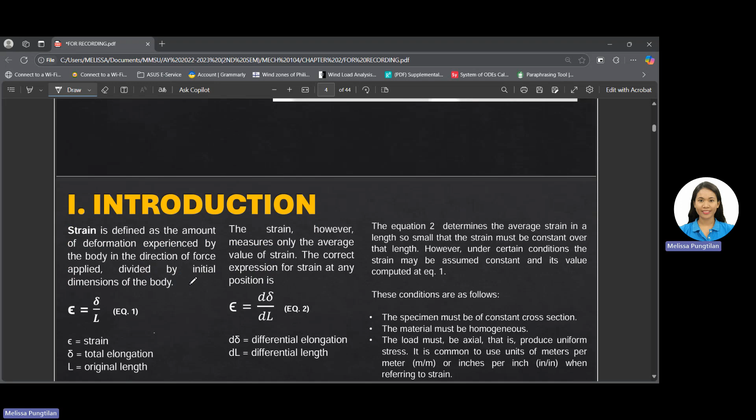So, here, strain is defined as the amount of deformation experienced by the body in the direction of force applied divided by the initial dimensions of the body. So, strain, this is read as epsilon, okay? Epsilon or strain is equal to the total elongation divided by the original length. So, yan yung tinatawag natin na amount of deformation experienced by the body, okay? Or yung ating strain. And then, the strain, however, measures only the average value of strain. The correct expression for strain at any position is equal to the differential elongation divided by the differential length.

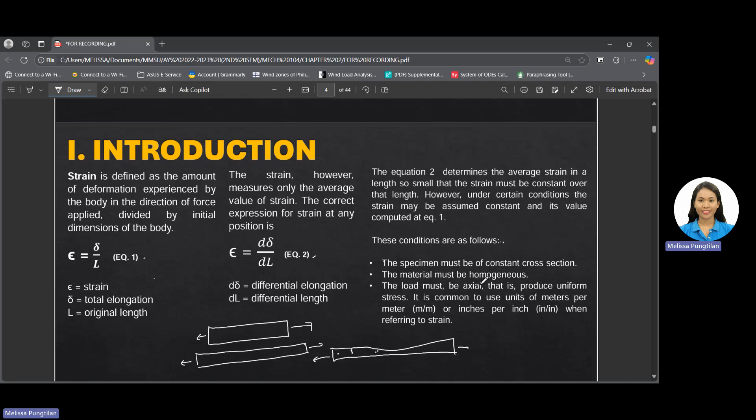Okay? So number 1, the specimen must be of constant cross-section. The material must be homogeneous. Sabihin, it is made up of one material. Okay, made up of one material. So pag ginamit natin yung formula na to, make sure na this is a homogeneous material.

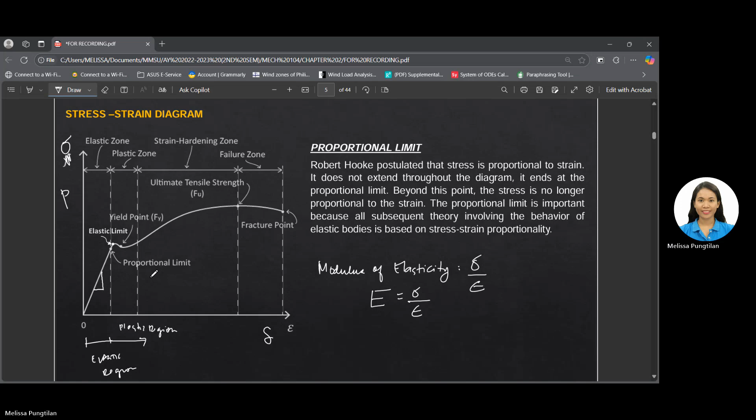Okay, so elastic limit, ito po yun. Ayan. So, ibig sabihin ng elastic limit, if we applied a force that is equal to the elastic limit or below the elastic limit, pag in-apply natin sa isang material, and then tinanggal natin yung force na yon, it will return to its original length.

Okay? Kunwari, meron tayong rubber band, or meron tayong rubber that is equal to, let's say, 50 millimeters. Ayan. So, yung elastic limit ng force is equal to, let's say, 5 kilonewton. Mataas. Sige. 5 kilonewton. Okay. So, for this one, pag nilagyan ko ng 5 kilonewton yung ating rubber band, take note, nasa elastic limit tayo, ha? Bali, yung elastic limit is equal to 5 kilonewton.

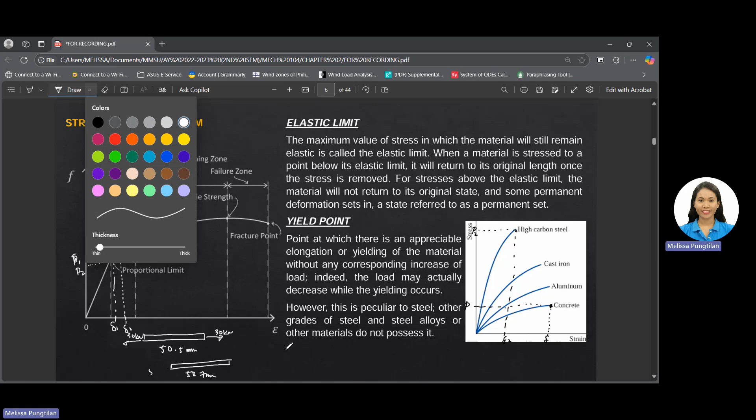Unlike sa concrete. Kung may hindi pa nakakita sa inyo ng mga column or beam na ginagamit sa site na made up of steel, usually ang shape nun is I-shape. Ito yung ginagamit sa mga large construction project, ginagamit na beams or for columns because of this property na kahit lagyan mo ng malaking load, the deformation is still minimal.

Pero bakit palagi nating nakikita is yung concrete? Kasi in terms of cost, napakamahal kasi ng bakal, mas mahal yung bakal compared sa konkreto. Kaya hindi pa masyadong ginagamit or hindi usual na nakikita sa site yung paggamit ng steel because of its price.

But in terms of its mechanical properties, steel are better than the concrete. At yung kanyang constructability, mas mabilis yung pag-install natin ng mga bakal compared sa konkreto. Sa konkreto kasi maghihintay pa tayo ng 28 days or yung tinatawag natin na curing period bago natin siya loadan or gamitin.

Maghihintay ka pa ng tinatawag natin na curing period. Sa high carbon steel, aside from mabilis siyang i-weld or i-bolt, i-connect with each other, the constructability ay isa sa pinaka-advantage, aside from dun sa mechanical properties. Pero mahal kasi yung cost of the steel compared sa concrete.

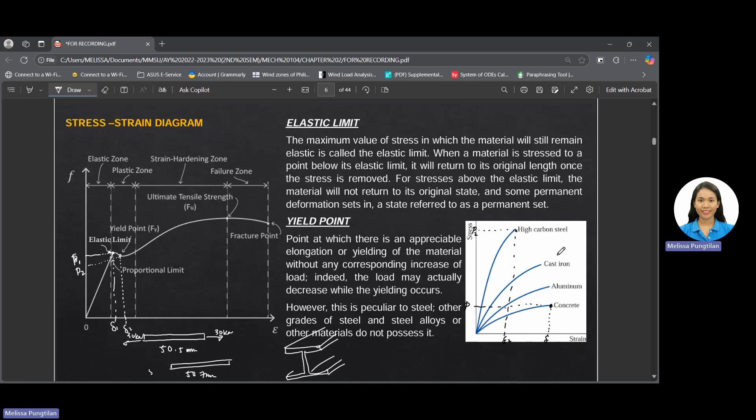And then we have also here yung cast iron and aluminum. Yan yung usual na nangyayari sa mga material natin on site. Ito yung basis nila kung bakit concrete yung gagamitin ko, kung bakit aluminum, or bakit steel, because of the stress and strain diagram of these materials.

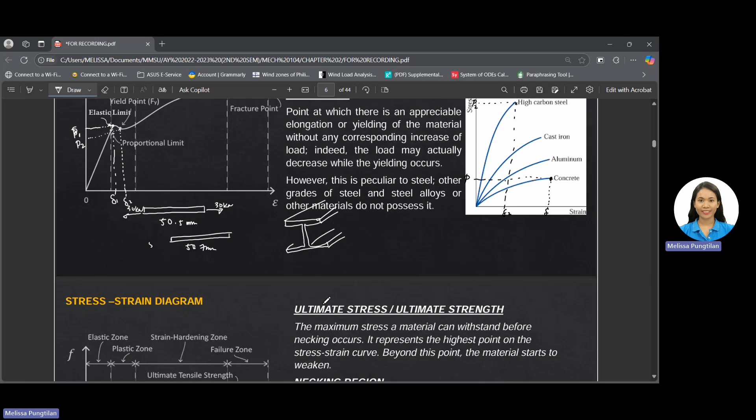Okay, so let's proceed to the next point, which is the ultimate stress or the ultimate strength. This is the highest point of the stress and strain curve, or ito yung pinaka-maximum force or pinaka-maximum stress na kayang i-withstand ng isang material bago pa siya mag-fail. This is the highest ordinate.

Kung natatandaan ninyo dun sa first chapter natin, the idea of the safety factor. The safety factor is equal to the ultimate strength divided by the allowable strength. Sabi ko sa first chapter, hindi natin pinapayagan na yung mga material natin ay maloadan sa pinaka-maximum na stress, kasi any additional stress or load will now tend to fail yung material natin.

Ang pinapayagan lang natin na pwedeng i-load sa isang material is the allowable strength, because of this diagram. Pag nagdagdag ka pa ng force dito, matic, mag-fail na yan. Kasi from the word ultimate, meaning maximum, ito na yung pinaka-maximum na kayang buhatin ng isang material.

And then next to it is the necking region. In the necking region, the material reduces in cross-sectional area, concentrating stress in a localized area. This eventually leads to fracture or failure. So ang necking region ay dito sa part na to, just after the ultimate tensile strength.

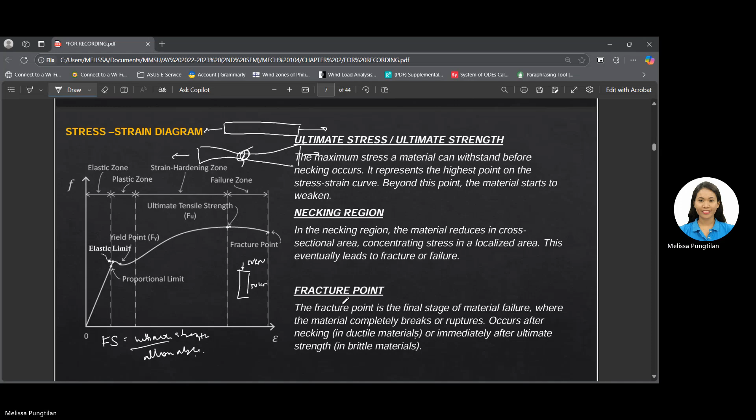Okay, let's proceed to the example of the stress and strain diagram, or the application of the stress and strain diagram, before going to Hooke's law.

Mechanical properties pala ang tawag dito sa mga points kanina na na-introduce sa stress and strain diagram. Those are the mechanical properties of the materials. So the test for steel is what we call the ASTM A370.

Dito, meron tayong certain length of a bar or a steel bar, tapos lalagyan natin ng load. Titignan natin kung ilan yung capacity o magkano yung kayang buhatin ng ating steel. Yan yung tinatawag natin na tensile test for steel para makita natin yung kanyang capacity. ASTM A370 - anyway, you will be encountering this one later on during your third year.

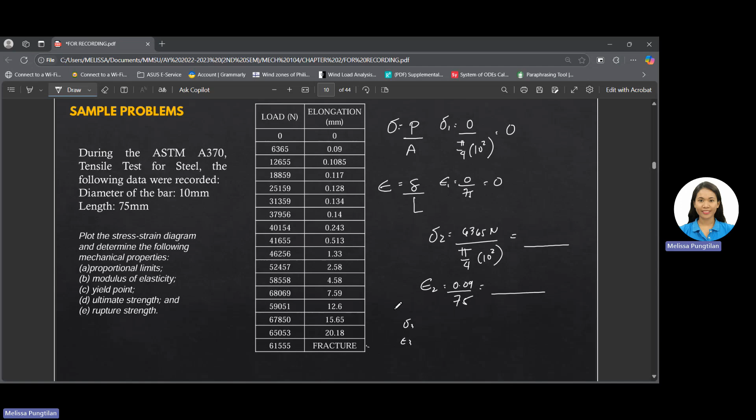And then proceed again to stress 3, strain 3, until you finish this point. I already solved this earlier, so solve it on your own also. This will be the answer for the stress and strain, based on this computation. Continue on until you finish the last one.

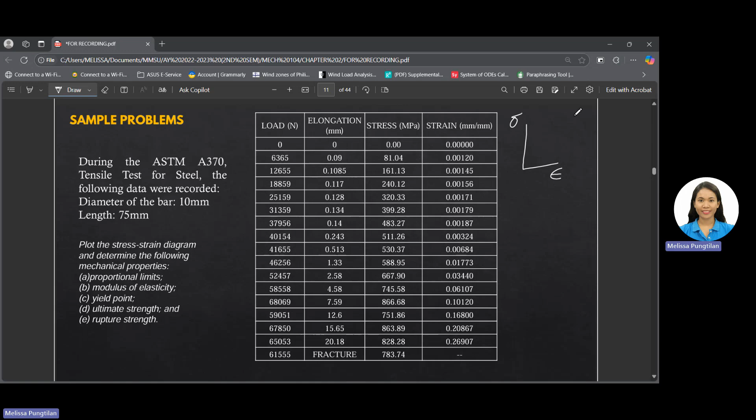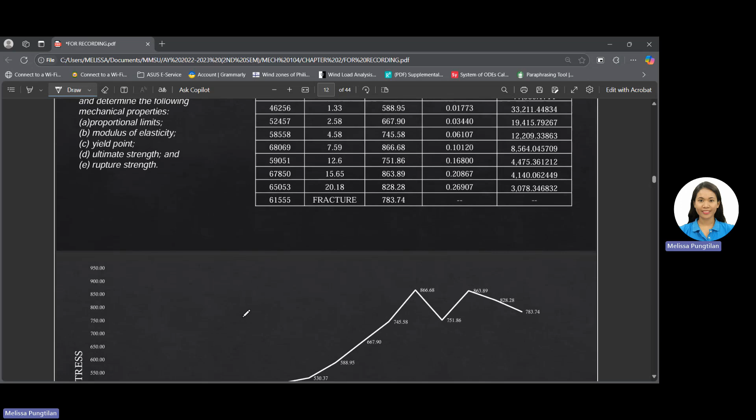Based on the stress and strain we computed, we can now draw the diagram. On the x-axis is the strain, and on the y-axis is the stress. I already plotted our diagram earlier. So this is now the diagram, the strain and then the stress: 81.04, and then we have 0.0012, 161, 001, and so on.

So, based on this diagram, we are now ready to determine what the problem is asking. For letter A, determine the proportional limit. We said earlier that the proportional limit is where the straight line ends, the straight line or the proportionality of the stress with the strain. Based on this figure, we have 483.27 megapascal. Take note, when mechanical properties are being asked, we are referring to the stress.

Next, for letter B, the modulus of elasticity or E. For modulus of elasticity, it is the proportion or ratio of the stress divided by the strain. As I said earlier, this is what we can see here, that's the slope, right? This is what we call the modulus of elasticity. So here I will refer to its highest point, which is 483.27, divided by the respective strain: 483.27 and 0.00187.

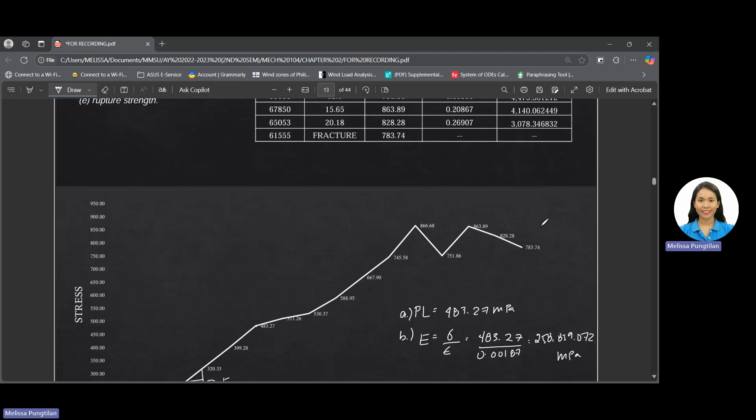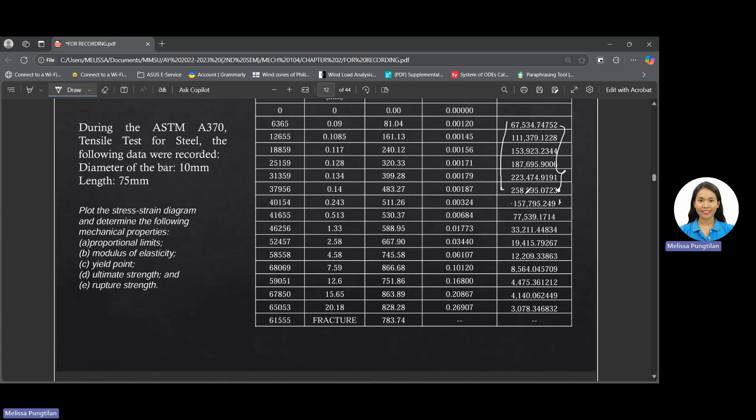Just a correction from section A, and I think section B. I didn't compute the modulus of elasticity for this one before, but upon computing it earlier, there's a decrease in the modulus of elasticity. So we can't use the elastic limit. What we used was the point of the elastic limit, which is 511.26 divided by 0.00324, that yields 157. Now if we look, there's now a decrease in the slope, a decrease in the relationship of stress and strain. As we said earlier, modulus of elasticity is the ratio or slope of stress with strain. So here we can see the proportionality stops, it was increasing, increasing, but at this point there's now a decrease. That means there's no more proportionality at the elastic limit. So what you should consider in getting the modulus of elasticity is the proportional limit, where the proportionality of stress and strain is located. Take note of that for section A and section B.

For letter C, we have the yield point. The yield point is a point after the elastic limit. So this is the proportional, that's elastic, and then yield point. We have 530.37 megapascal.

For letter D, the ultimate strength, that is the highest ordinate. So the ultimate strength is 866.68 megapascal, the highest ordinate.

For letter E, the fracture or rupture strength, fracture strength or failure, these are all the same. That is equal to 783.74 megapascal. So that's our answer for number 1.

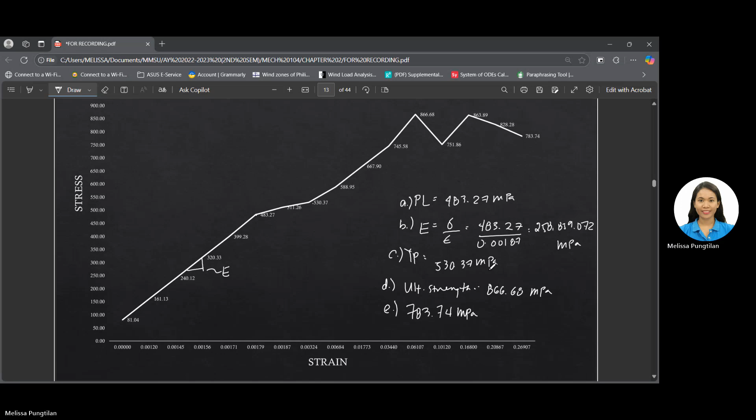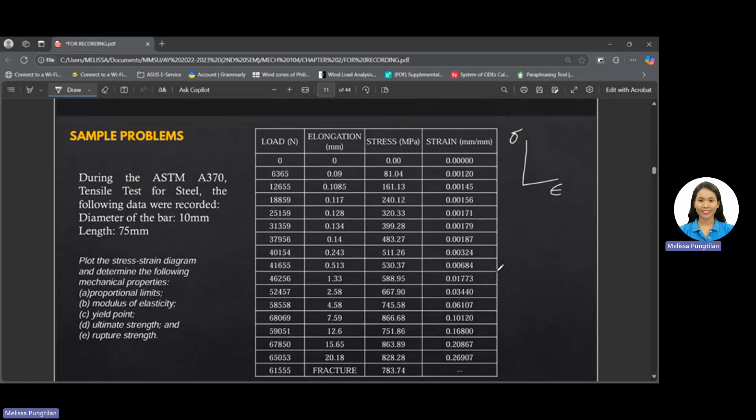Next, let's proceed to number 2. Ay, wait, let's discuss Hooke's Law first. Let's proceed to the next topic, which is Hooke's Law.

The axial and shearing deformation. Our objects undergo two types of deformation, depending on the force applied to them. The first one is axial deformation. In axial deformation, the force applied is axial force, which may be either compression or tension. When there's compression or tension, there's a change in length. So in axial deformation, when axial force is applied, there's a change in length.

Here we will be utilizing what we call Hooke's Law. Hooke's Law is just the relationship of stress with the modulus of elasticity. This is the formula introduced earlier: modulus of elasticity equals stress divided by strain. But if we're talking about Hooke's Law, it's just equal to stress equals modulus of elasticity times strain. So this is what we call Hooke's Law by Robert Hooke, the proportionality of stress with strain.

Actually, I'm using some mnemonics para mas maintindihan na, mas papadali yung memorization natin of formulas. Okay, so this one is nakaka-stress ang exam everyday. So, that is the mnemonics. Pag Hooke's law, nakaka-stress ang exam everyday.

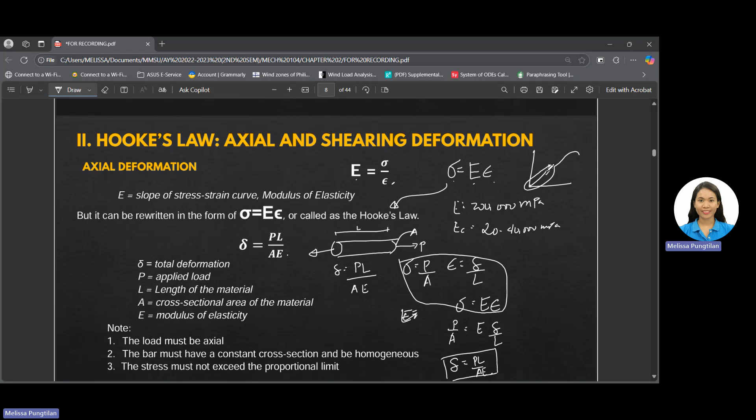So, note, in using this formula, the load must be axial, tension or compression lang yung force natin. The bar must have a constant cross-section and must be homogeneous, and the stress must not exceed the proportional limit. So yung stress na gagamitin natin dito must be just within the proportional limit, kasi yung Hooke's law na to is only intended within the proportional limit. So hanggang dito lang dapat yung force na gagamitin natin, at this point only, dun sa proportional limit. Hindi na po pwede siyang mag-exceed, kasi nandito yung Hooke's law.

Next, another type of deformation is the shearing deformation. Kung sa axial deformation, we have change in length, dito sa shearing deformation, we have change in shape. So this is the original shape, we have a rectangle here. Nag-apply tayo ng shear force. Again, shear force is a force that will cause sliding to an object. So, yung dating rectangle nagkaroon ng change in slope or naging parallelogram. So, the deformation here is the change in shape.

So, if we will apply the Hooke's law here in shear, gagamitin lang natin ng same idea, pero instead na epsilon, which is the deformation divided by length pag nasa axial tayo, pag nasa shear naman tayo, we will be using gamma. This is epsilon, this is gamma. Gamma is equal to the shearing deformation divided by the length. Based on this one, this is the change in the slope. That is equal to tangent gamma, which is equal to opposite, the shearing deformation, divided by the length.

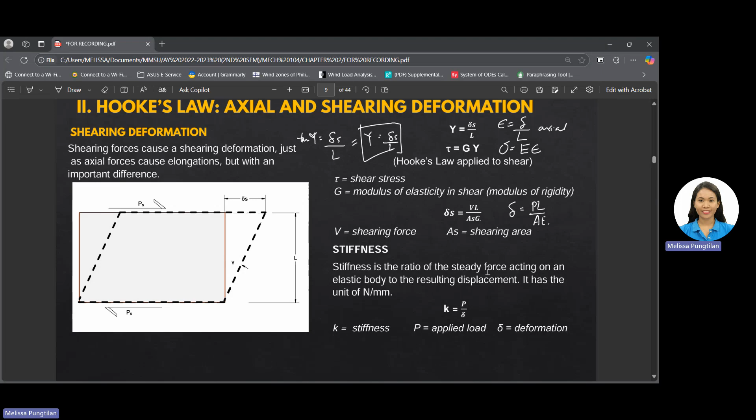So, the higher the value of the stiffness, ibig sabihin, mas firm or mas stiff yung ating material. The less the structure will deform under the amount of force. The greater the stiffness, the lesser the structure will deform. Ayan lang yung ibig sabihin ng stiffness. So, stiffness is equal to P divided by the deformation. So, those are the important formulas na kailangan i-familiarize.

Again, i-familiarize, hindi i-memorize. Familiarization lang ang kailangan natin dito. Lesser lang yung memorization. Kasi pag naintindihan mo yung concept nito, mas madaling balikan yung mga formulas. Concept first before memorizing those formulas. Okay? So, let's proceed now to examples 2 to 5. So, yung examples 2 to 5 natin are now the application of the deformation.

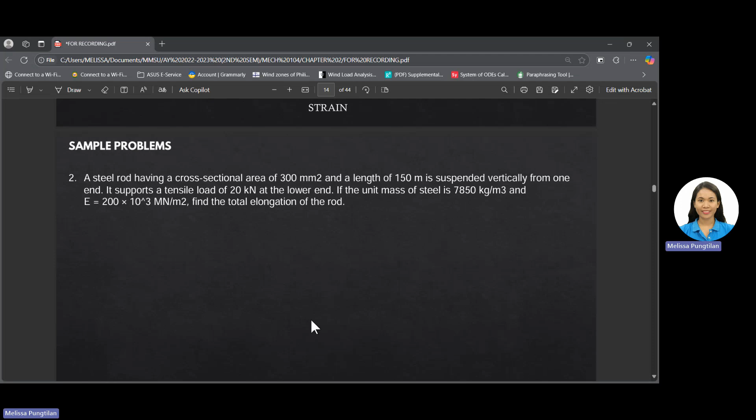Okay, for number 2, a steel rod having a cross-sectional area of 300 square millimeters and a length of 150 meters is suspended vertically from one end. It supports a tensile load of 20 kilonewtons at the lower end. If the unit mass of steel is 7,850 kg per cubic meter and the modulus of elasticity is 200 times 10 raised to 3 meganewtons per square meter, find the total elongation of the rod.

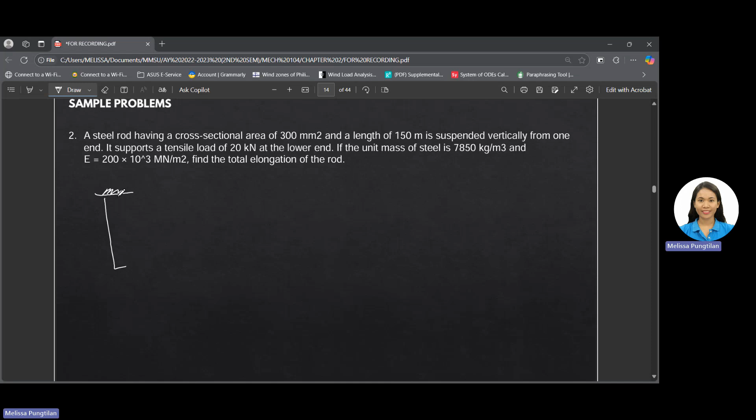Okay? So, meron daw tayong rod that is suspended vertically. And yung rod na to, it has an area that is equal to 300 square millimeters and a length of 150 meters. So, 150 meters.

This is a large structure, no? 150 meters. And then, it supports a tensile load at the lower end that is equal to 20 kilonewton. So we have here force is equal to 20 kilonewton. If the unit mass of steel is 7,850 kg per cubic meter, so yung unit mass of steel na yan, that is what we call the density kasi naka-kilogram per cubic meter. So we have 7,850 kg per cubic meter.

And the modulus of elasticity is equal to 200 times 10 raised to 3 megapascal. Find the total elongation of the rod. Okay, what will be the total elongation? So, based on the structure here, it is vertically suspended. Pag vertically suspended yung isang material, dalawa yung nagko-cause ng elongation dyan. Number 1 is yung external force. So yung total elongation natin, it is due to the external force, tawagin nating deformation 1.

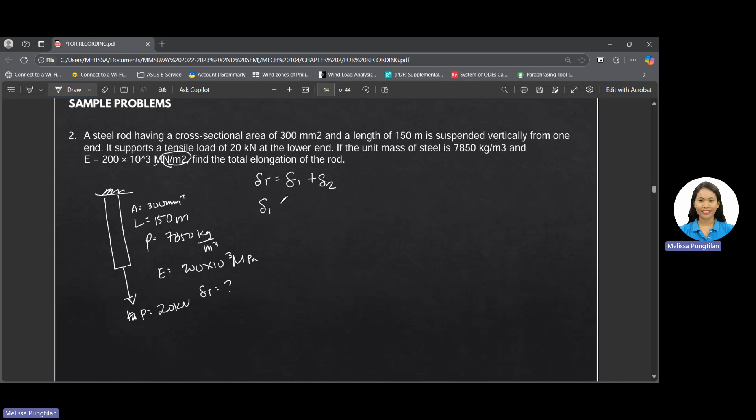And then, meron pang isa. Since nakasuspend siya vertically, due to its own weight and due to the gravity, magkakaroon ng elongation kahit walang 20 kilonewton because of the gravity. It is suspended vertically. So, tawagin natin yung deformation na yan due to its own weight or due to the gravity is the deformation 2. So sa deformation 1, this is due to the load. So we can apply PL over AE, on which P is equal to 20 kilonewton.

So it is better to make it in Newton and millimeter lahat ng ating values here. So 20 times 10 raised to 3 Newton. What is the length? We have 150 meters or 150,000 millimeter. What is the area? 300 square millimeter. And then, what is the value of the modulus of elasticity? We have 200 times 10 raised to 3 megapascal or Newton per square millimeter. So this deformation is equal to 50 millimeter. Next, the deformation 2 or due to its own weight.